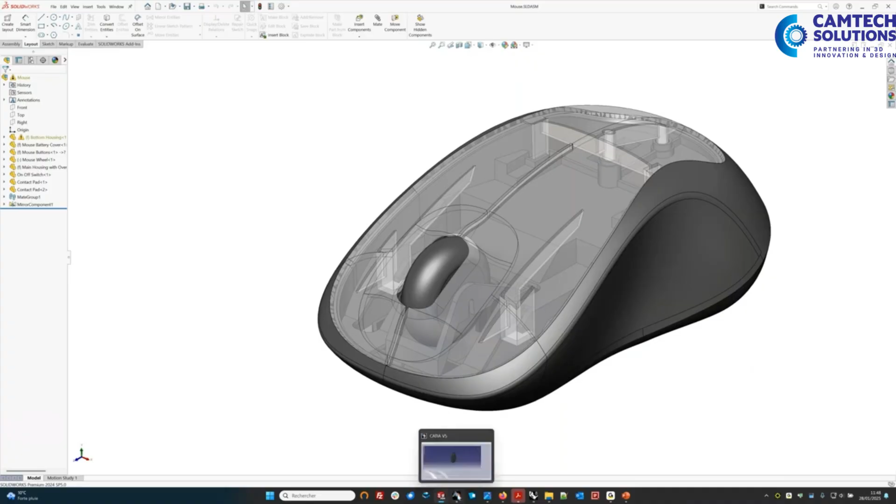So this is it. As you can see, we are now in CATIA V5, and you get your full model, your full assembly. Again, you have the same colors as we have seen in SolidWorks. You have the components, you have the names, and we even have preserved the transparency effect.

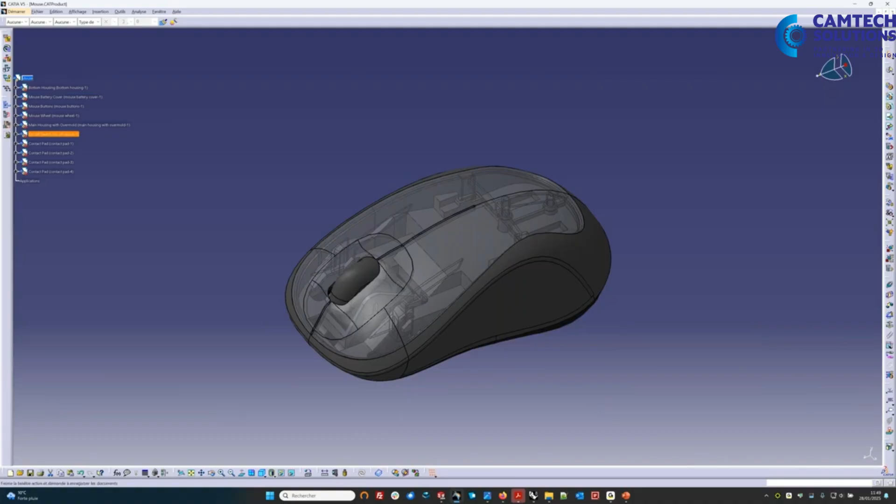So you're ready to work now in CATIA V5. A second case study: now we're going to show Cross Manager a little bit. So we will start with another file, this time from CATIA. So this is the source file that I show you in CATIA. As you can see, what's interesting here is we have a lot of PMI information.

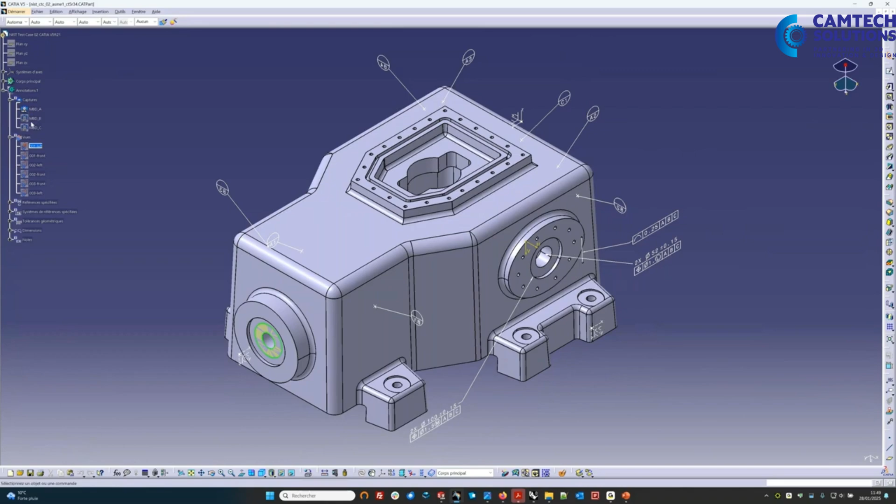As you may know, in CATIA, they are organized in views and captures. We got 3, for example, here. So you can activate A, B, or C. I will show you that this is also converted. So we will use this time Cross Manager. Imagine you don't own a license for CATIA, but with Cross Manager, you can perform the conversion.

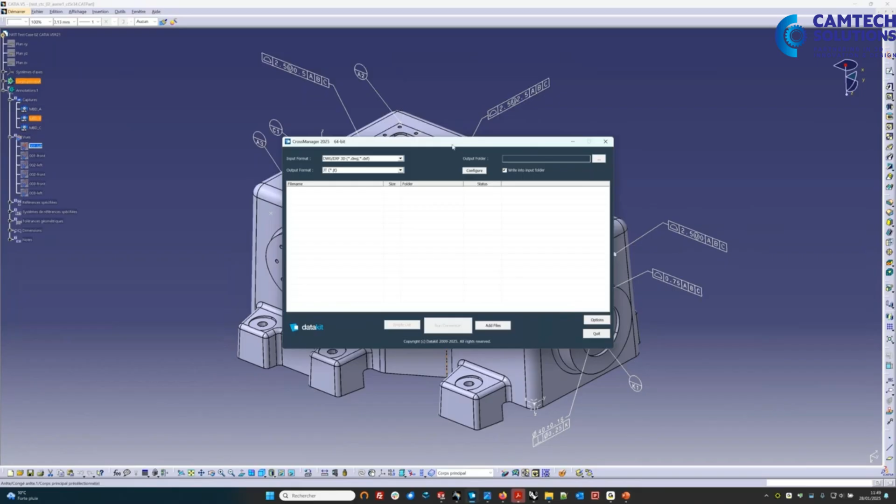So always the same, very straightforward. You just have to select the input format. I propose here to make a conversion into JT. So imagine that you have files from CATIA and you want to send the files to a partner who's using Siemens PLM software. So it's a good thing to use JT, which is the standard conversion format of the Siemens world.

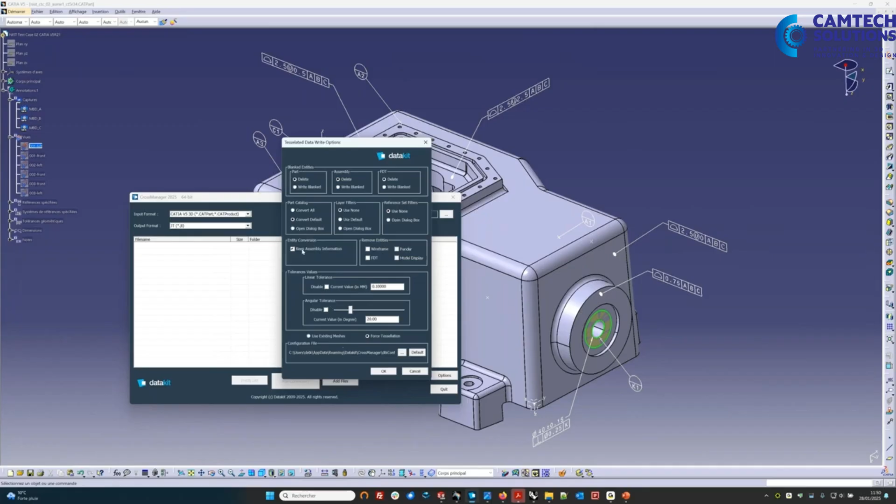So in Cross Manager, just input, output. Then you have some options in the configure menu where you can manage visibility of the entities, configurations, layers, things like that, assembly information, and some filters. And also, if the output is tessellated, you can parameter the tessellation. You can set it.

Then very simple, you just take your file, import it into Cross Manager. So either drag and drop or you have an add file button, and you can run the conversion. So in the window, you have a status telling you it's in progress. You have a window showing up, showing you the file and progress bars. Here it's very quick. And then the result status is OK. So it's here that you can see that the conversion performed successfully.

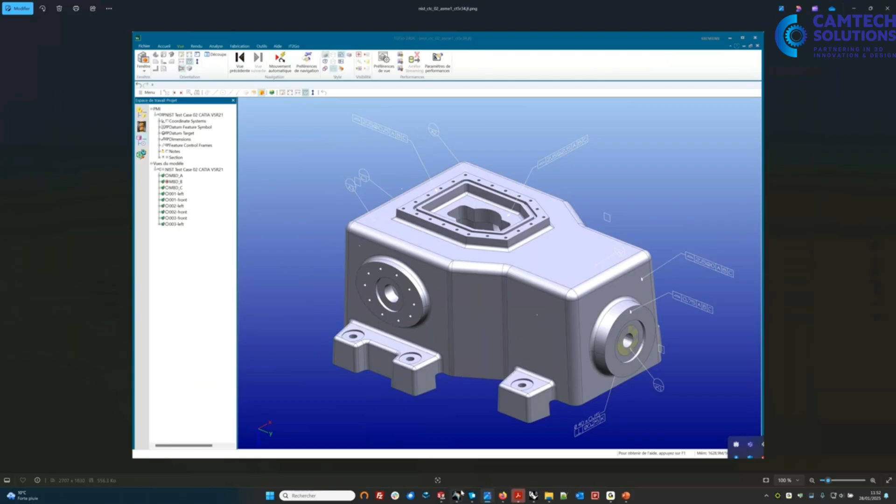I propose to take a look at the results. So this is the output that you get in JT. And as you can see, you've got the geometry, all PMIs are there, and also you have the captures. We're showing here capture B. As you can see, it's really the same as what you had in CATIA. So you preserve this kind of information.

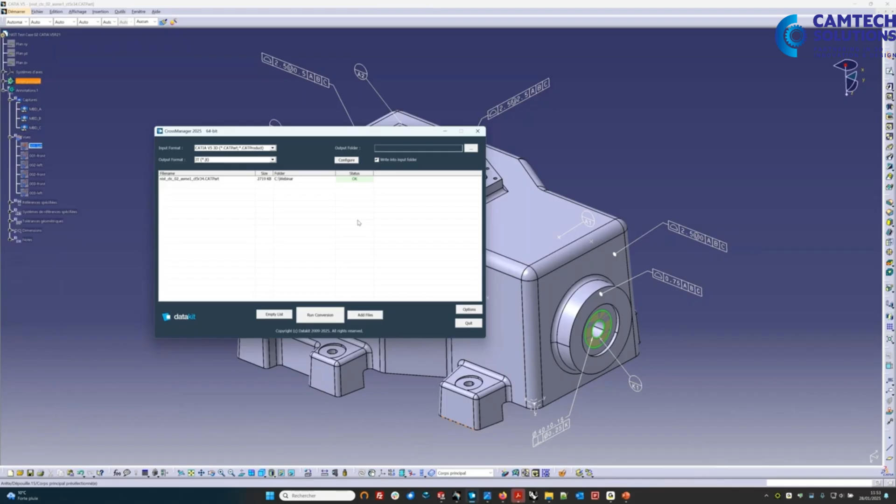Another interesting bonus that we offer with Cross Manager is that with any purchase of license, we include free of charge a 3D PDF output. The interest of this is you may not have the license for the software of the output format. You may not have a license for the Siemens software, and still you have to deliver files. So how do you do when you're unable to check them? One thing you can do is export to 3D PDF, so you can convert your file and then check what we've been able to read directly in Acrobat Reader.

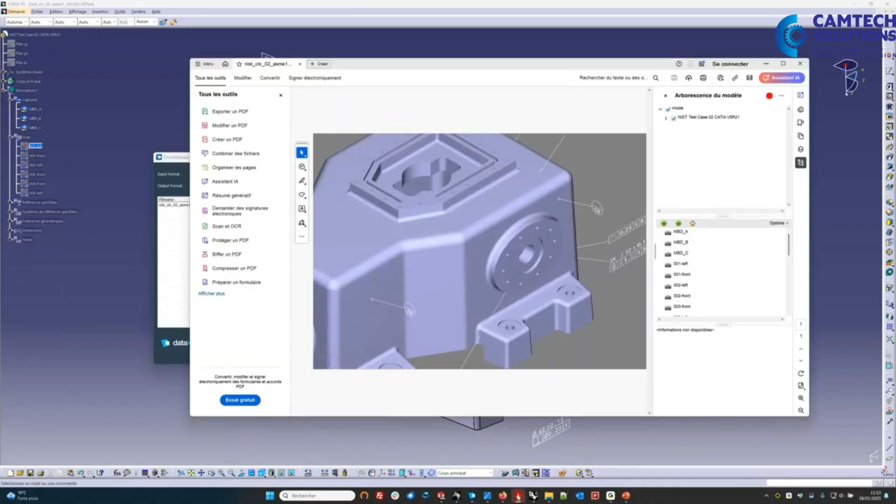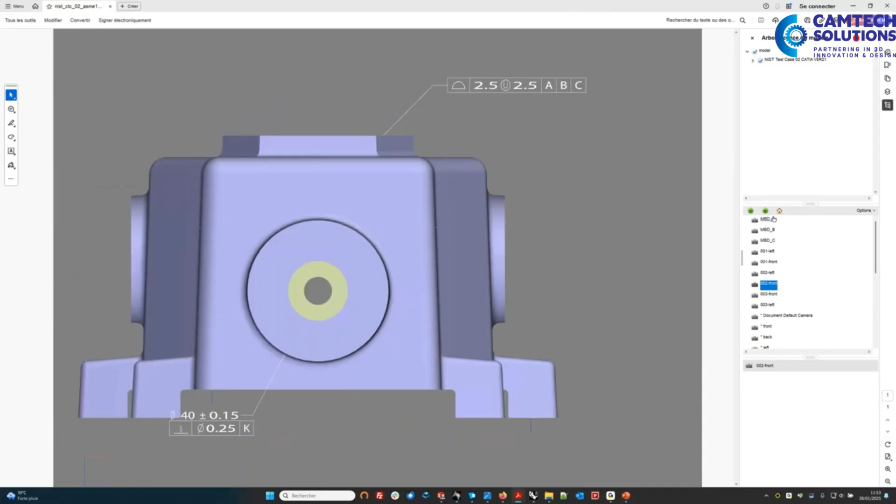We move to Acrobat Reader right here. So you get the file again, and even if you cannot read the JT, you're able to check the information that we've been able to read. You have the model here, you have different views, everything is there. You have the captures, A, B, C, everything is here. You also have information in the tree. If there are metadata, you can also check them in Acrobat Reader, at the bottom right of the screen. And in addition, in Acrobat Reader, you can do measurements and cut views, things like that.

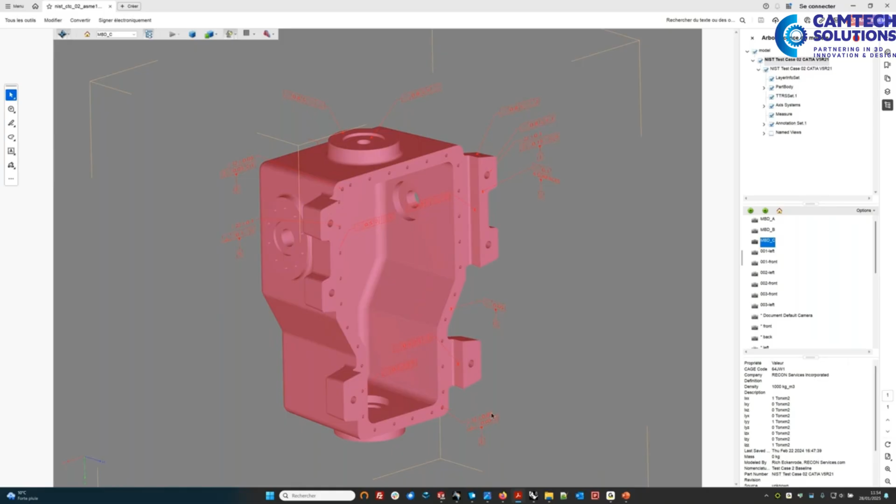So these are the functionalities with Cross Manager. Now let's move on to a third case. Now we will move to Rhino to show the Rhino plugins. So again, once the plugin is installed, you get a menu directly here, Datakit Exchange, very straightforward. This time I will show you just some imports of the same assembly in various formats to show you the multiplicity of formats. As you can see, directly from the menu, you have a vast number of CAD formats to choose from.

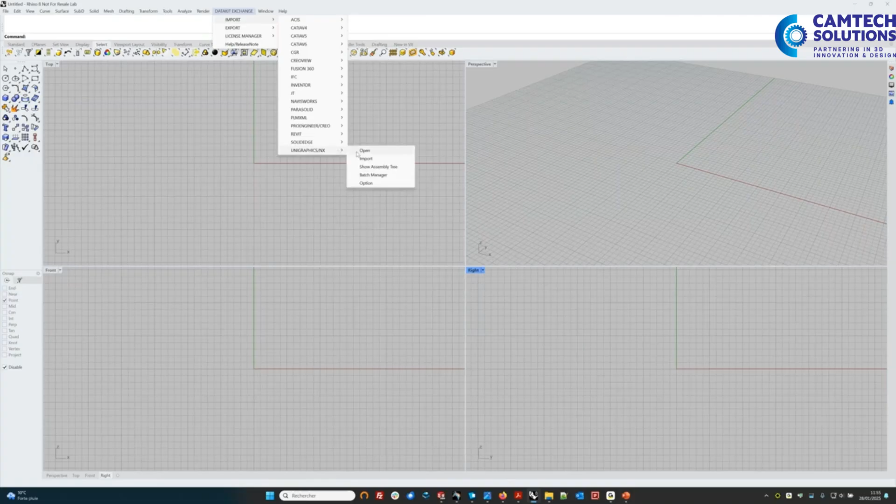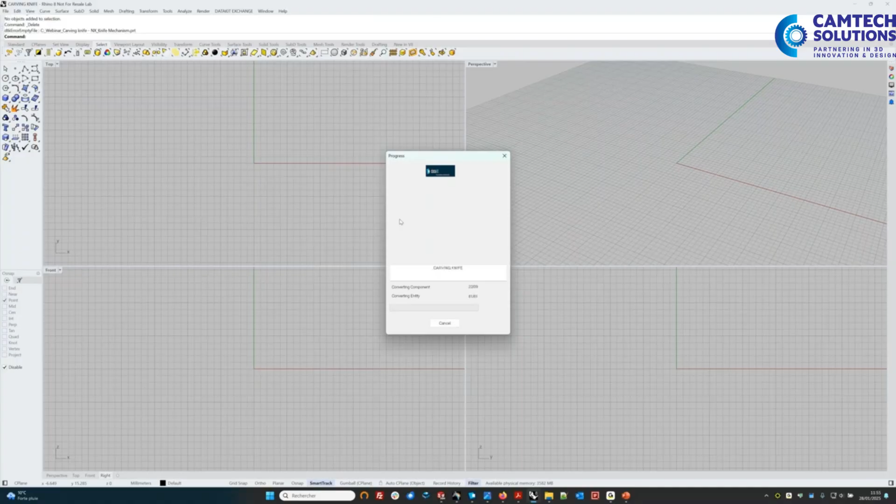So let's say you want to load an assembly in UG NX. Just a few clicks, UG NX open, and you get your file. You just have to select the head of the assembly and you load the whole assembly. Again, you have a window with progress bars to show you where you are in the conversion process, and you get your file directly in Rhino. You're ready to work in Rhino. So you can work with people from Siemens using UG NX, no problem. You got all the components, as you can see, directly in Rhino.

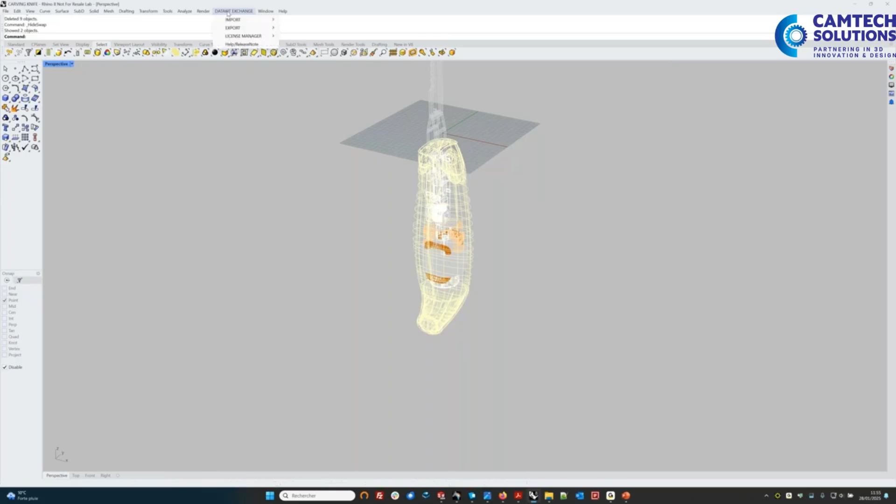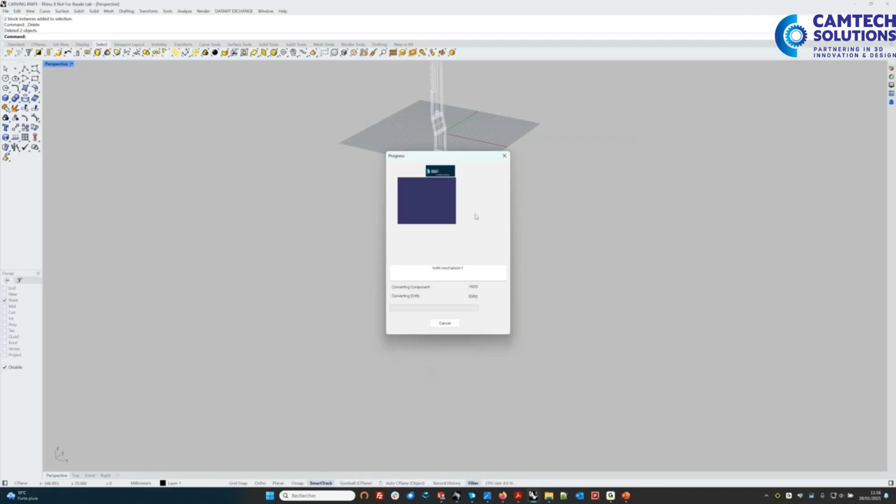Same process. You've got your import window with progress bars. All components are loaded. You're ready to work in Rhino. And one last thing I would like to show you is the fact that we also handle tessellated formats, which are made of mesh facets.

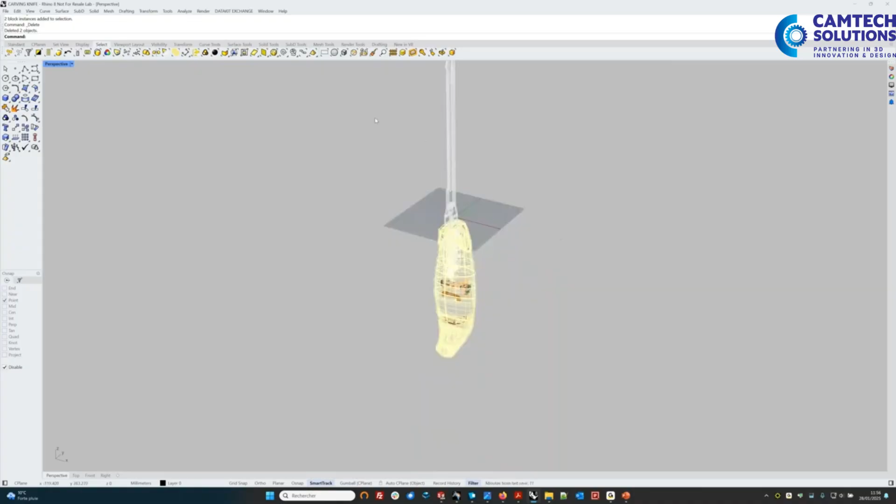So we will illustrate this by importing a CGR file. So CGR is the graphical representation format of CATIA, and it's made of tessellated geometry. So again, same process. You browse to your CGR file.

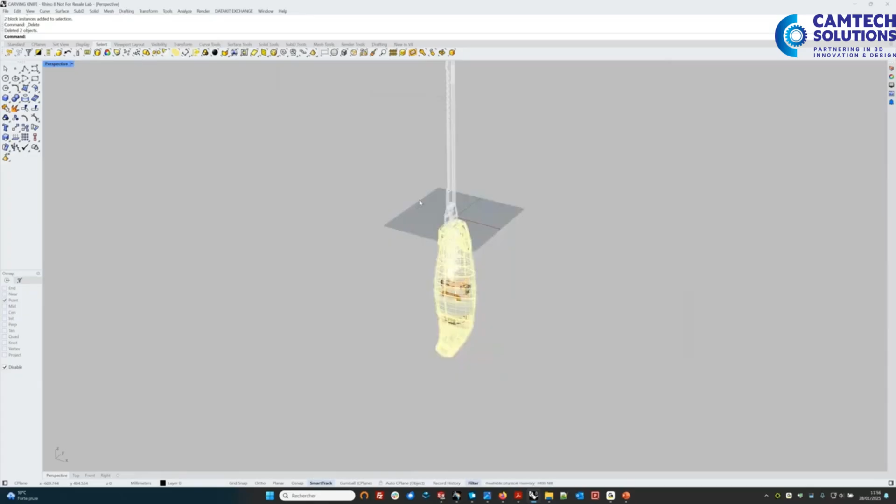It's even faster because it's mesh, and as you can see, you get the geometry and you have all the triangles. Since Rhino can handle mesh, this is what you get. And again, you're ready to work. So this is it for the 3 case studies. I will go back to the presentation now.

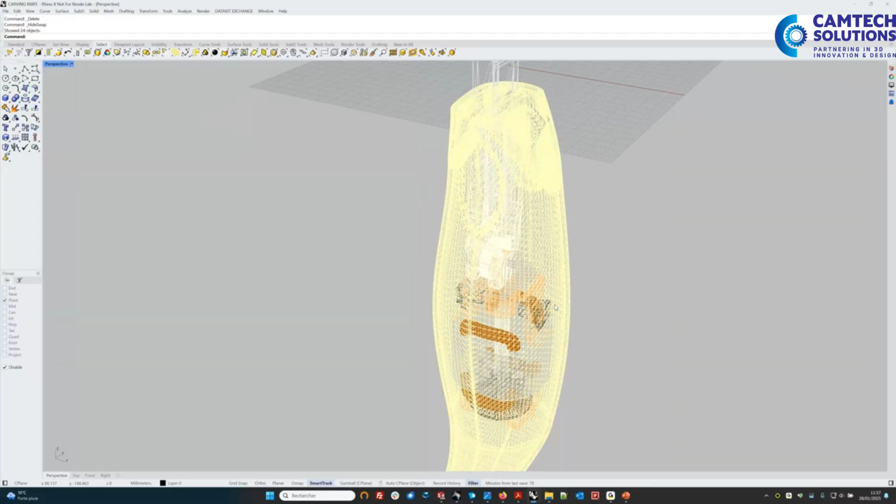So thanks for your attention for this presentation. A little summary about the advantages offered by our converters. There is a wide range of data that is quickly available. So as you may have seen, we handle parts, assemblies with their complete structure, components with the names, we handled colors, transparency, you have seen metadata, PMIs.

The conversion is faithful. You have no data alteration or loss of information. And the transfer is fast. We have in mind that the preservation of the integrity of exchange data is essential to ensure that all critical information is correctly retained throughout the product lifecycle. So this is really important.

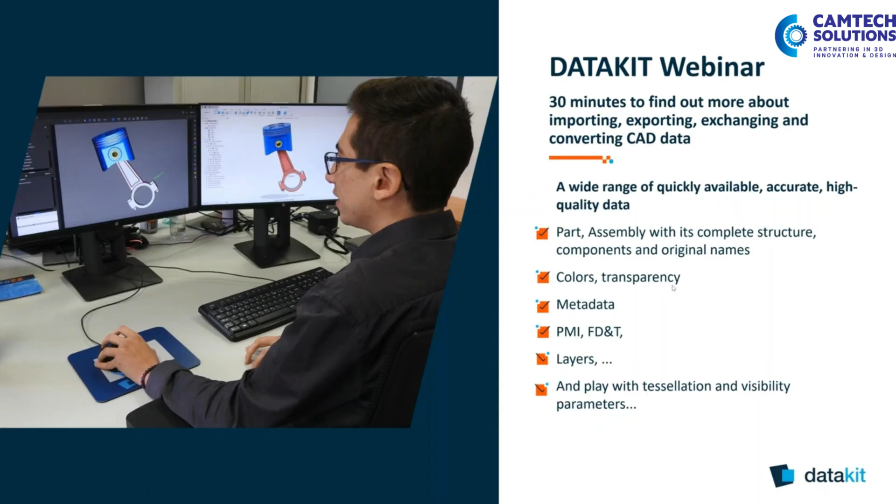You may also have seen that the range of CAD formats was very broad as well. We have most major CAD formats on the market and more. Then a few words about the different types of license that we offer. So we try to base our commercial offer on the needs of the company, its size, its various units, and also the frequency of the file conversion.

So different possibilities. The first one is a perpetual license, so no expiration date. And it comes with an annual maintenance contract that you can subscribe. So the license never expires, and if you subscribe to the maintenance, you have access to updates and support. Second option, the annual license. That is a more economical solution for temporary needs or one-off conversion. So it's your choice depending on your budget and organization.

In addition to this, the licenses can be fixed, node locked, so attached to a single computer, or it can be a floating license that is installed on a license server, and it's available for several users, with also the option of having only one or several tokens, that is several simultaneous accesses for the license. And finally, we offer bundles for the converters that are most widely used in certain sectors. Especially, they're well suited to SolidWorks and the Rhino plugins.